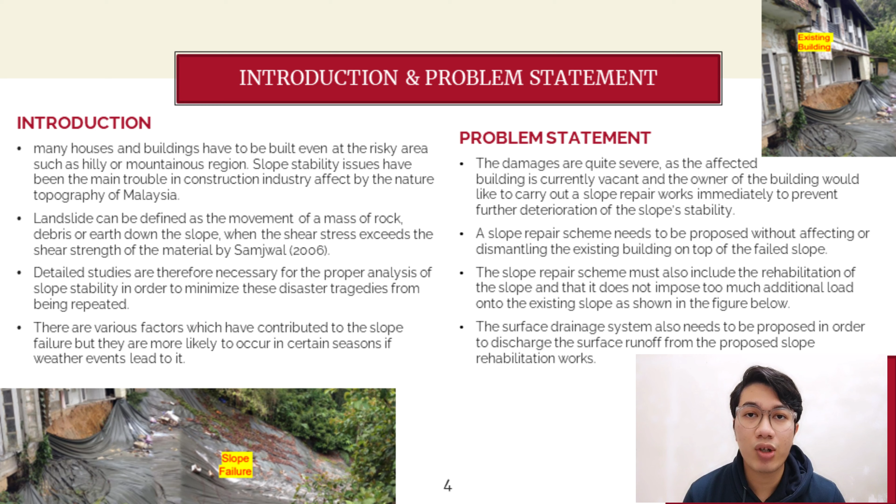Hence, we have proposed a slope repair scheme, a surface drainage system, and also the slope rehabilitation work, so that we can prevent further damage to the existing slope. So the main objective of this project is to propose a slope repair scheme which does not impose too much additional load on the existing slope, without dismantling or affecting the building on top of the slope. The next objective is to propose the most compatible surface drainage system in order to support our slope rehabilitation work.

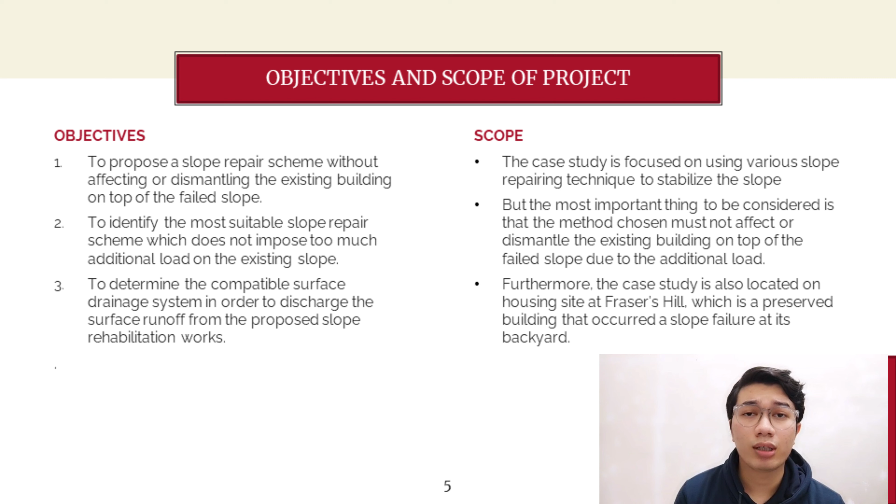So the scope of this project is that our study is focused on using and analyzing various slope repairing techniques to stabilize the slope. Furthermore, the case study is focused on the housing site of Fraser's Hill.

Hi, my name is Muhammad Fahmi bin Ahmad Fauzi, and I will present the literature review for our case study, which consists of background research, location and position of the case study, and also geographical factors. For background research for this case, two issues are the most important to be solved: to propose a slope repair scheme that will not affect or dismantle the existing building on the slope, and to propose a surface drainage system that will discharge the surface runoff from the slope rehabilitation works.

We need to understand and master the operational principles and procedure of the technique while comparing the existing solutions that will suit the conditions and requirements of this case best. We also need to give attention to the consequences and impact in terms of social environment that will occur from the proposed solution method, along with the countermeasures. We also need to monitor and collect data for the purpose of further analysis.

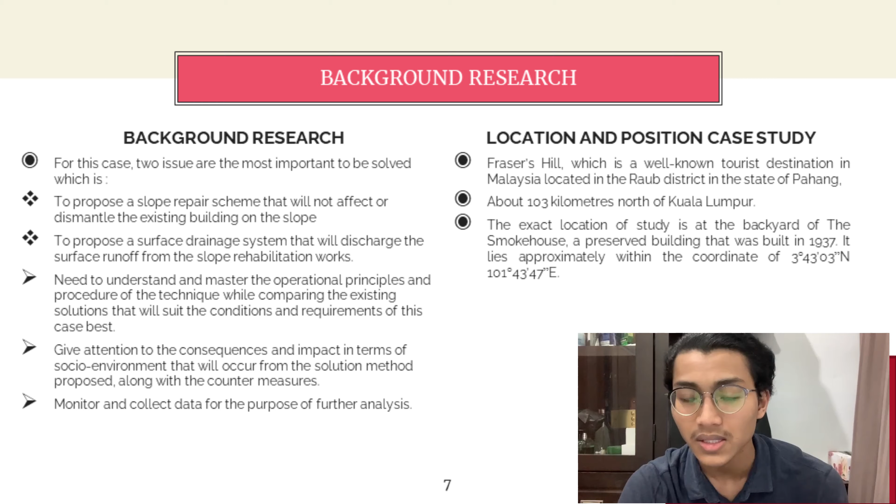The location of the case study is at Fraser Hill, a well-known tourist destination in Malaysia located in the Raub district in the state of Pahang. It is about 103 kilometers north of Kuala Lumpur, while the exact location of the study is at the backyard of the smokehouse, which is a preserved building that was built in 1937. It lies approximately at the coordinates of 3 degrees 43 minutes 3 seconds north and 101 degrees 43 minutes 47 seconds east. On the next slide, we can see a picture of the exact location for our case taken from Google Earth.

Next, the geographical factors consist of type of soil, regional climate condition and slope angle. For type of soil, based on the existing geological map, the catchment and its surroundings are mainly composed of Main Range granite. Granitic rocks are known to be very sensitive to weathering and are vulnerable to landsliding. Next, regional climate condition. This place receives an average of 208 rain days in a year, characterized by high average annual rainfall and humidity. During heavy rain, infiltration of rainwater into the soil will make the soil saturated, thus reducing the shear strength and decreasing the friction between the soil grains, which can initiate mass movement down the slope.

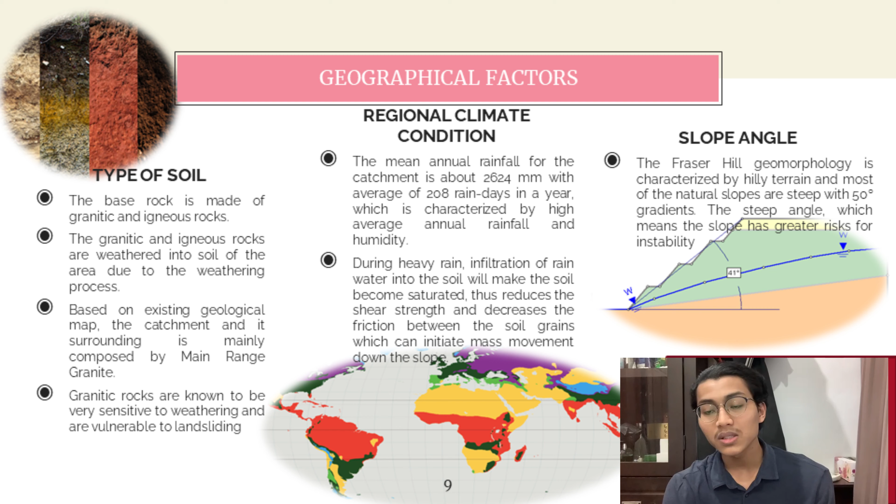And next, slope angle. The Fraser Hill geomorphology is characterized by hilly terrain, and most of the natural slopes are steep with 50-degree gradients. The steep angle means the slope has a greater risk of instability.

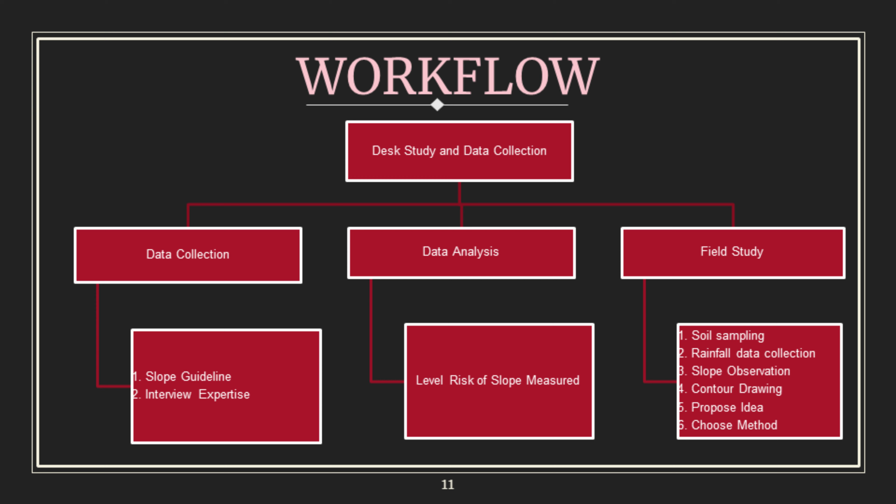This is the workflow for our project. We are going to the factors of slope erosion, which are dislocated pipe and water leakage, weather, and plasticity of soil. For dislocated pipe and water leakage, a broken pipe may harm property and affect the surroundings and residents. It happened to become a disastrous problem for Fraser Hill, as there is slope erosion because of broken pipe and

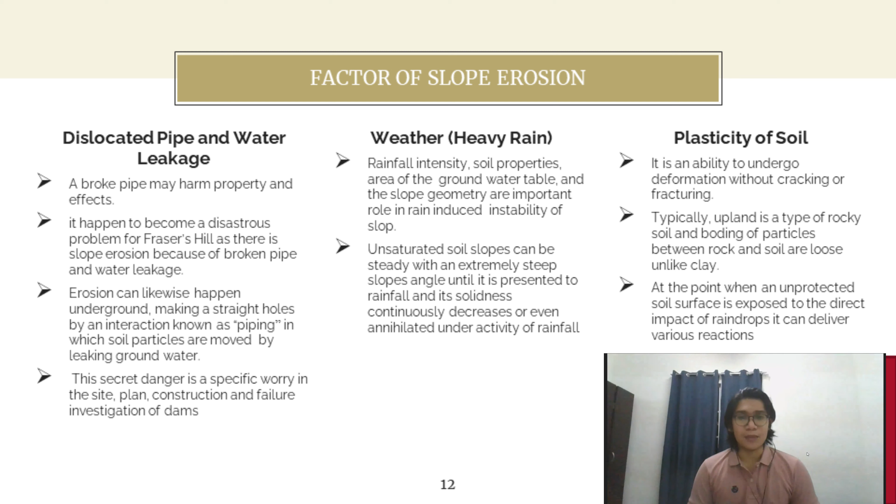water leakage. For weather, which is heavy rain, rainfall intensity, soil properties, area of the groundwater table, and slope geometry play an important role in rain induced instability of slope. So for plasticity of soil, there is actually an ability to undergo deformation without cracking or fracturing. Typically, upland is a type of rocky soil, and bonding of particles between rock and soil are loose, unlike clay.

Five best methods for slope stabilization: geogrid, that is commonly used to reinforce retaining walls, which are commonly made of polymer material. Then soil nailing. The soil nailing method is used to hold up soil to make it more stable. Then vegetation. Vegetation totally covers the dirt and catches all falling raindrops on or near the surface

at slope. Then install foundation stabilizer, and the last one is making slope drainage, because slope drainage can decrease groundwater level and permit water to run off without making damage to the slope or facilities underneath.

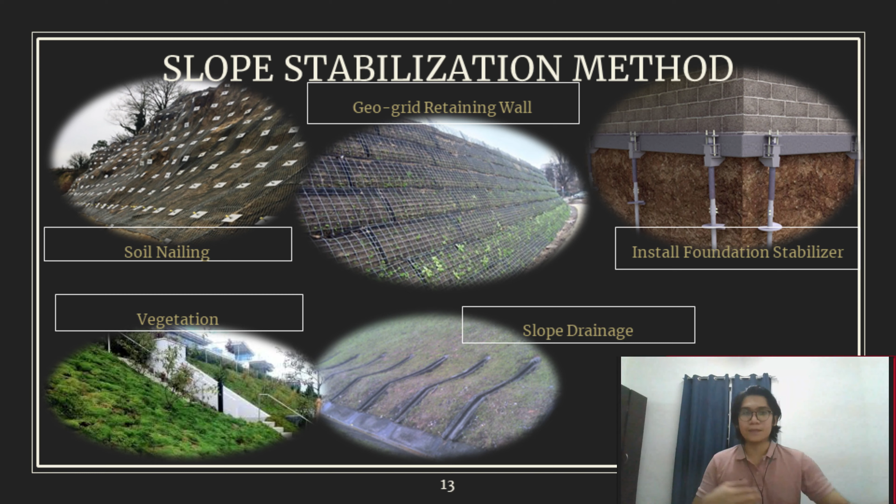Okay, for the part of slope analysis, we could conclude that the slope is quite steep because the slope grade value is more than 1, and the value of the angle of elevation is 51.12 degrees, and it is more than 45 degrees, and the percentage of the slope shows the value of 124%.

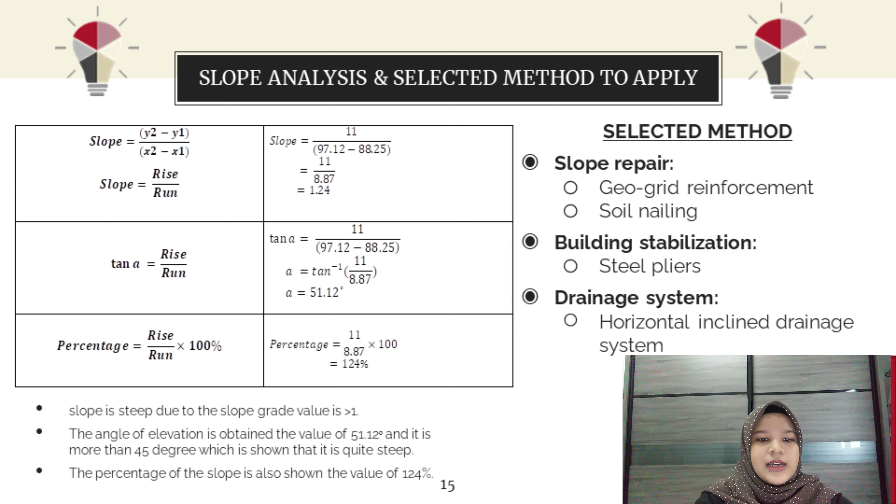And the selected method that we have chosen for the slope repair is geogrid reinforcement and soil nailing. For the building stabilization it is steel piers, and the drainage system is horizontal incline drainage system. Okay, next we go to the geogrid reinforcement and soil nailing.

As we know, geogrid reinforcement is easier and faster to apply to the critical condition of the building and the slope, and this is because geogrids have a higher tensile strength than soil. And additional geosynthetic components might be included to reinforce steep slopes to reduce groundwater seepage and to improve the steep slope stability and erosion resistance. And there are a few cases that use this kind of method, such as Yeager Airport Runway.

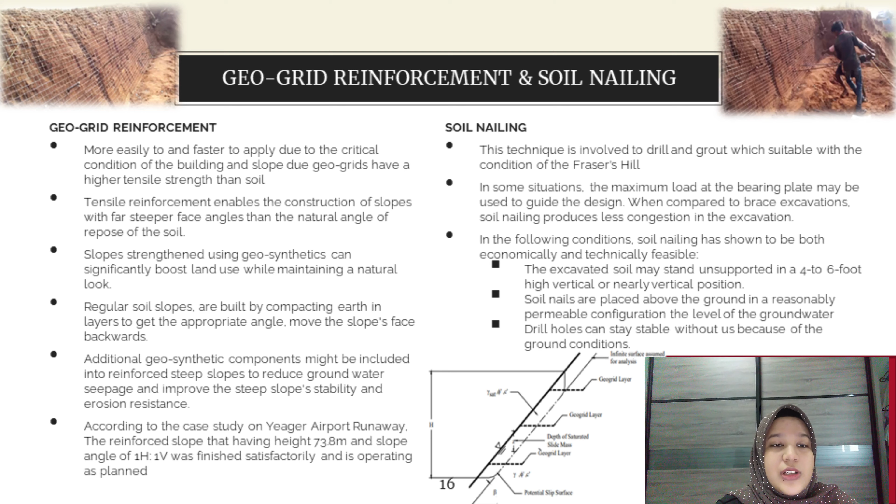For the soil nailing, this technique involves drill and grout, which is suitable for the Fraser's Hill condition. In some situations, the maximum load at the bearing plate may be used to guide the design when compared to the braced excavations. Soil nailing produces less congestion in the excavation.

Okay, next we are choosing to use the steel piers and drainage. This is because these techniques are most suitable to solve the unstable building foundation, as the building is situated at the hill position, which is steep and has quite a huge heavy building on it. So this method could save the foundation of the building, so it will keep it stable for a long time.

And once the load-bearing soil is reached, a hydraulic manifold lifting system can elevate the foundation and reclaim the lost elevation. And this is good for restoring the value of your property by making the foundation safe and solid.

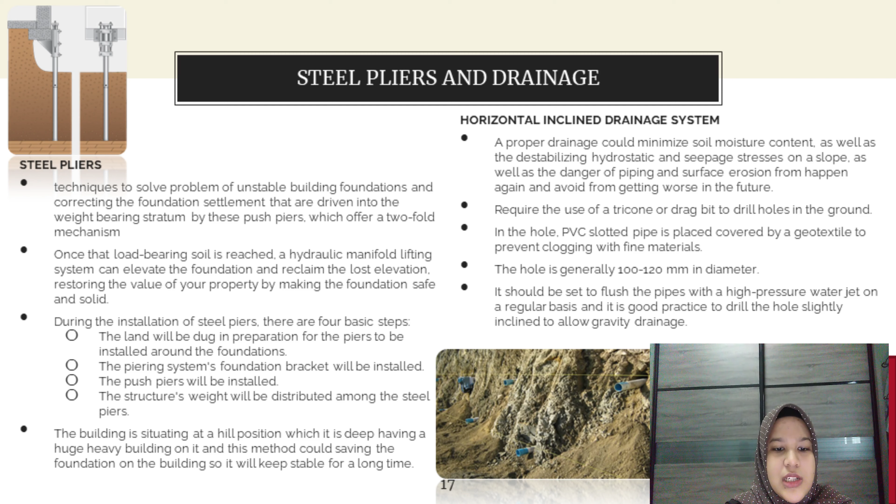For this kind of drainage system, it requires the use of a tricone or drag bit to drill holes into the ground. In the hole, PVC slotted pipe is placed, covered by a geotextile to prevent clogging with fine materials. The hole is generally 100 to 120 mm in diameter. So we want to give you a clear visual demonstration to give more understanding towards the method that we have chosen, and we apply it on the slope.

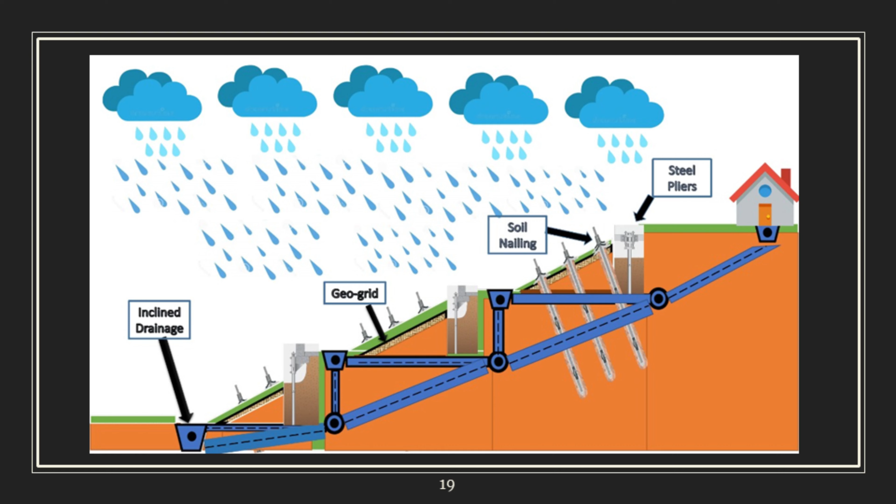For the conclusion, as we know, the slope failure occurred because of the broken water pipes and heavy rain which occurs at Fraser's Hill. Also, in order to choose the most suitable method of slope stability, we have to first determine and analyze what makes the slope fail. After a few mindful considerations, we have chosen a few techniques such as using soil nailing and also installing the geogrid, as well as choosing the horizontal drain for the surface drainage system.

Lastly, to conclude, we must not ignore this proposed slope repair system, because even though it's quite minor, it is a required step to achieve slope stabilization success.